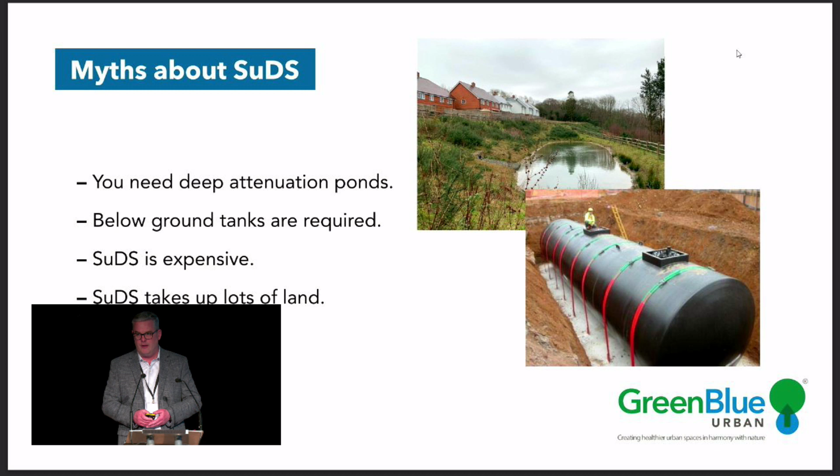Now, regarding the ponds, there's loads of good stuff associated with ponds. However, on some development sites, when you're really wanting to max out on units, if you can capture the water where it lands, which is what we generally term source control, and we've got the ability, which I'll touch on in a minute, to model these interventions really carefully, it sometimes means that a big bomb crater or a huge buried tank can be reduced in size significantly. We had a developer recently in Suffolk who redesigned their drainage scheme, and they came to us saying, we've actually achieved 20% extra units. So they were very much better off.

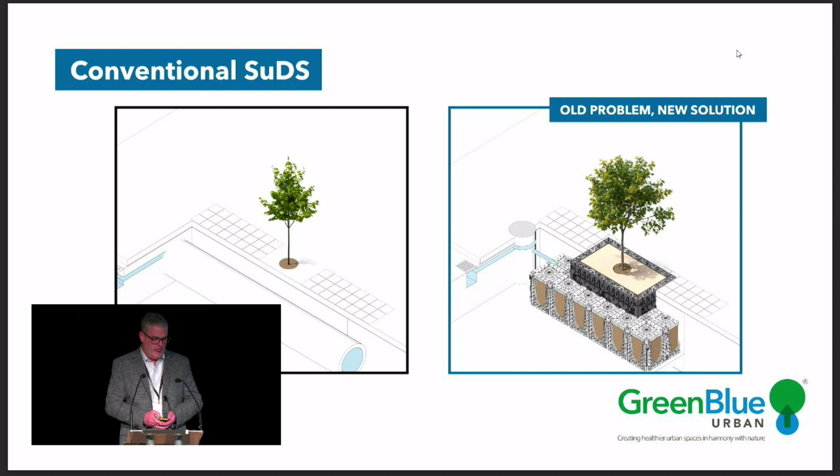So a couple of little illustrations there. We've got the old problem and the old solution, which is potentially an oversized pipe, whereas the new solution is really carefully managing the surface water, maybe around, for example, a tree pit. So a lot of you probably are aware that to get a tree to grow in an urban environment, a tree needs lots of good quality uncompacted soil.

Now, a lot of people don't know how much, and there's some brilliant formulas, which I won't go into too much detail now, but typically a tree might need anything from 15, 20, 25 cubic meters of soil, which is huge. That's a big hole. So to do that, we pioneered what we call the structural soil cell back in 2001. And we developed it. In principle, it's not unsimilar to an attenuation crate. You just simply fill it with soil. It's very, very strong structurally.

You put an aeration deck over the top, and then you can build a road or a car park or a pavement. And what it does is it preserves the integrity of that soil, so it prevents it becoming compacted and keeps it very well aerated. And of course, what we realized a decade or more ago now is that that profile is also an ideal profile to pass surface water through. There's loads of void space.

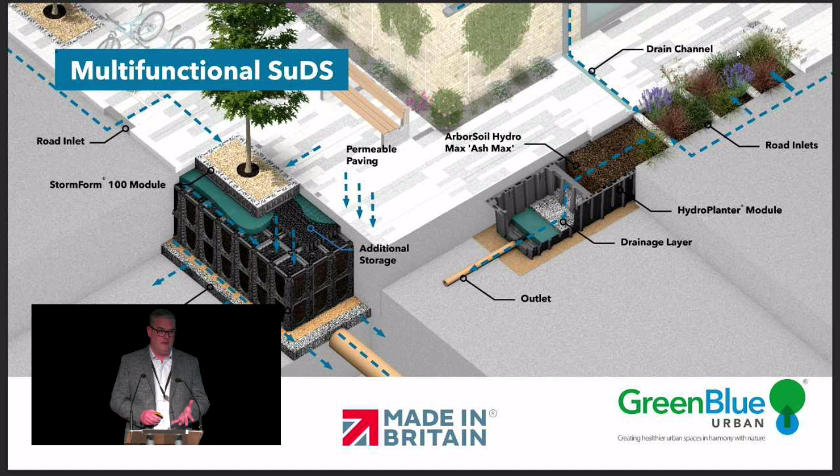Soil is brilliant at cleaning water. It massively slows the runoff down, and of course the tree benefits every time it rains because it gets a drink, particularly in the summer months. And of course, as we know, in the summer months, trees will actually use up quite a lot of water. It's difficult to quantify because of loads and loads of variables, so often again it doesn't go into modelling data, but we've done some testing of how much water trees can use, and even fairly newly planted trees can use 8 to 10,000 litres of water per year.

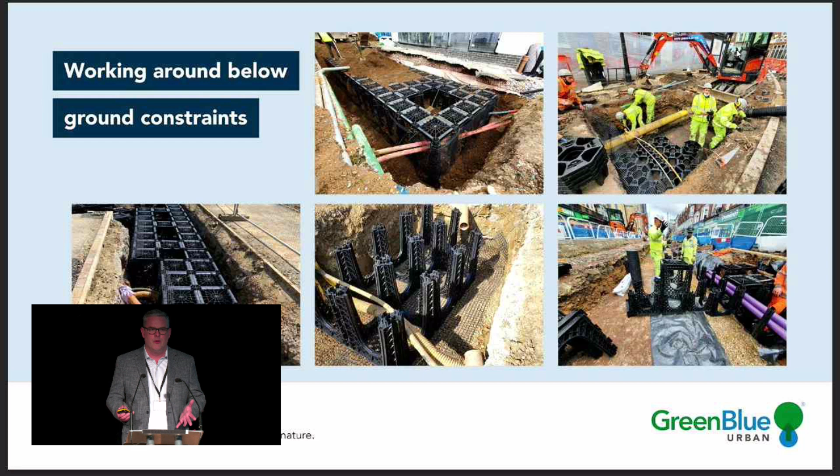Strongly recommend that you engage with the utility provider. However, I would say it's not infrequent for these sort of situations to happen, and the contractor has just got 2 days to plant his tree. So it's all installed and the utility provider is none the wiser. Now, I'm not too concerned about that because tree roots don't have diamond tips on the end. They're not good at drilling holes in things, and they'll very happily coexist around an awful lot of ducting. They'll get into a broken clay pipe and cause absolute mayhem, but a lot of modern pressure-tested utilities, they'll never ever cause a problem to.

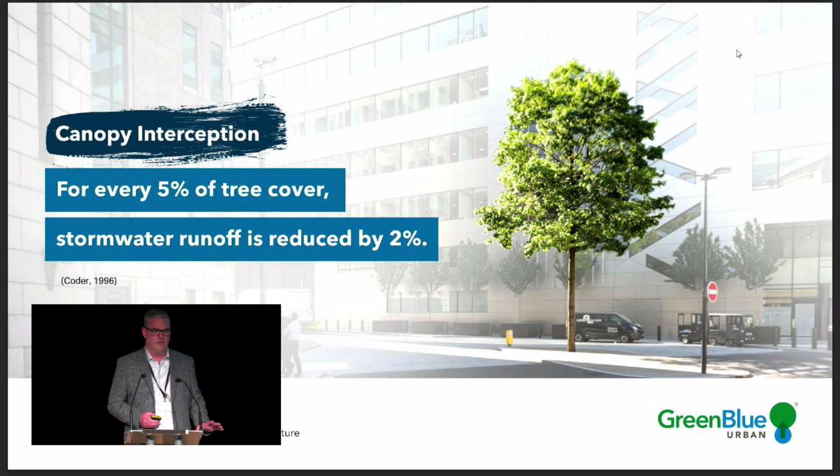This is quite a fun fact. For every 5% of tree cover, stormwater runoff is reduced by 2%. Now, that needs more research, absolutely without question, because there's so many different types of tree, and a lot of canopy cover is held while the tree is in leaf. So with a deciduous tree, you get very different performance during the winter months. But I don't know if you guys have ever been to St. Peter's Square in Manchester. It's one of the finest tree-covered squares, I think, in the UK.

It's got enormous Paulownia tomentosa trees, which are foxglove trees with huge leaves about the size of an A4 piece of paper. If you go there during a really sharp storm, you'll just get these wonderful rain shadows, so zones of dry ground underneath the canopy, and everybody runs underneath the trees for cover, and you just see a few wet footprints and lines from pushchairs and whatnot, but it stays bone dry, and the water that's landed on that canopy never ever reaches the surface.

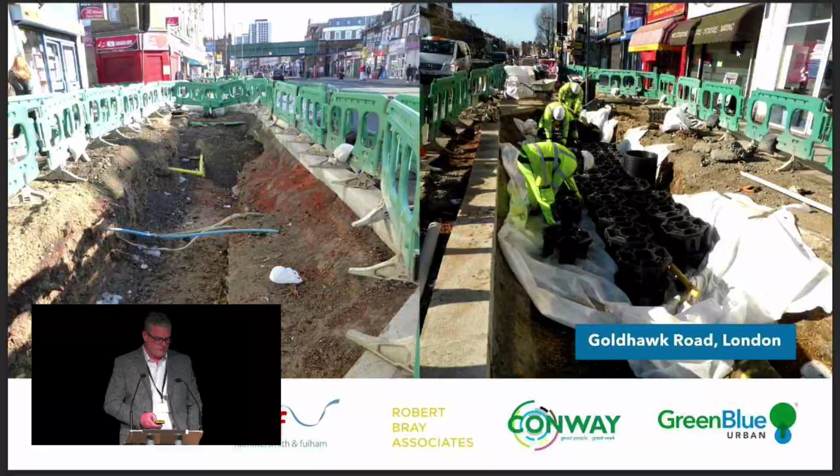So once it's installed, most people just walk past that without even realising. However, if you're aware of what's going on and you happen to be down there when it's raining hard, it is fascinating to see this water just disappearing into a curb inlet, and you know fine well that that is being really well filtered. It's watering the tree. In some situations, it'll be infiltrating back into the ground. I don't think it was here. But it's massively taking the peak off our sharp storms by slowing the water down.

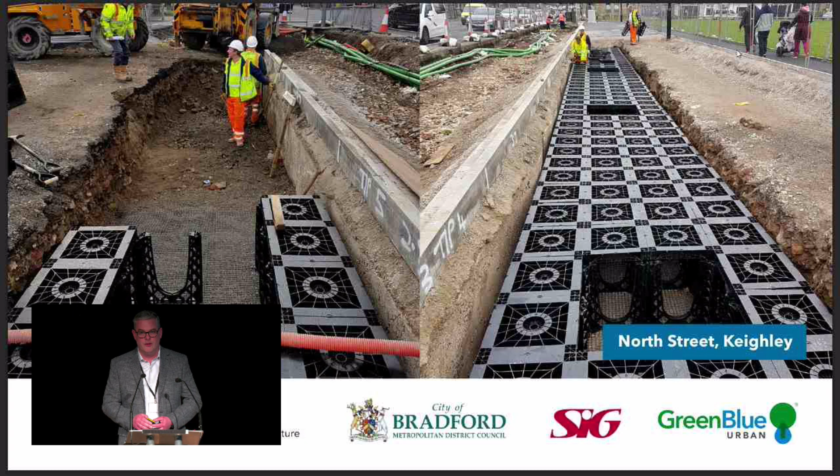This is another really interesting one. This is what I call a textbook SUDS project in Keighley, just outside of Bradford. This is our more modern soil cell, which we call the root space. Now, the contractor was a bit eager on this. On the right-hand side, he popped all the lids on without putting the soil in. So you'd have the gravel drainage layer at the base, then you install the system, fill it with soil, then you put the lids on, and then you have the layer works, obviously up to your wearing course above that. So you can see the metre square apertures where the trees are going to be planted, so it's always beneficial to link tree pits up where we can, because they can share rooting volume.

But the interesting thing about this is that there's several hundred square metres of a reasonably major town centre road. There's 3 lanes of traffic coming towards us. There's traffic lights, there's vehicles braking and ticking over and shooting off again. And you can see the gaps in the curb where the water's running in. There's obviously silt being washed in off the road. The weeds are sort of thriving on it. And maintenance is shocking. Those trees were planted in 2017, and I don't think anyone's been back there once.

We pop back there quite regularly because it's a really important project for us. But there's just a line of 6 trees. So Yorkshire Water are chuffed to bits. They've got a whole chunk of catchment taken out of their combined system. Those trees are growing like the clappers, faster even than if in a tree nursery. And all the benefits that trees bring: biodiversity, shade, reduction in wind speed.

At this point, quite a few people say, well, what about all the build-up of contaminants going to those tree pits? There's some guidance in the CIRIA SUDS manual that you ought to whip all this out and replace it every 25 years. Now, to me, without putting too fine a point on it, that is absolute nonsense. But it's all very well me saying that. Where's the evidence? So we did a lot of work begging for funding a year or so ago. Didn't get anywhere, so we funded it ourselves.

This is an interesting one. A lot of you guys will be very familiar with the Greener Grangetown project in Cardiff. We were very involved from early design stage on this one. For those of you who are not familiar with it, it's a sizable catchment. I think it's about 14 streets which back onto the River Taff.

And prior to this work happening, it's back-to-back Victorian housing, so very little chance for any water getting into the ground. All rushes off into the combined system, polluting the Taff. It's having to be pumped about 9 miles to the nearest treatment works. So we looked at a heavy engineering solution, bigger pipes, bigger pumps, 30-odd million quid.

And then we sat down and really thought, loads of liaison with the residents, absolutely critical on retrofit SUDS, get them on board. And we came up with a much, I'll say simpler, a completely different design scheme, which cost about a tenth. It was about 4 million by the time it had gone in.

And what we've done is we very carefully designed these little build-outs in most of the roads. The tree pit extends out underneath the paving areas. So those trees, although there's a little small area because parking's at a premium, the actual soil volume available for the tree is much bigger, about 8 to 10 cubic metres. And this scheme just works a treat.

You get a heavy storm, about 80% of the catchment that was going into the combined system is completely removed. They've got to keep a little bit in, I think, to keep the brick sewers cleansed to some degree. And this water is discharged straight into the Taff. The water that's going into the Taff is now very much cleaner than the water running down the Taff. And it's going out at a very controlled rate.

It's completely transformed the area visually. Aesthetically, it looks incredible. The property prices jumped 15% after the project was done. So it's an absolute win-win situation. So that's just one of the other streets. I've often thought if you're a savvy investor and you knew where a scheme like this was coming up, you'd buy up half a dozen houses and make a few quid.

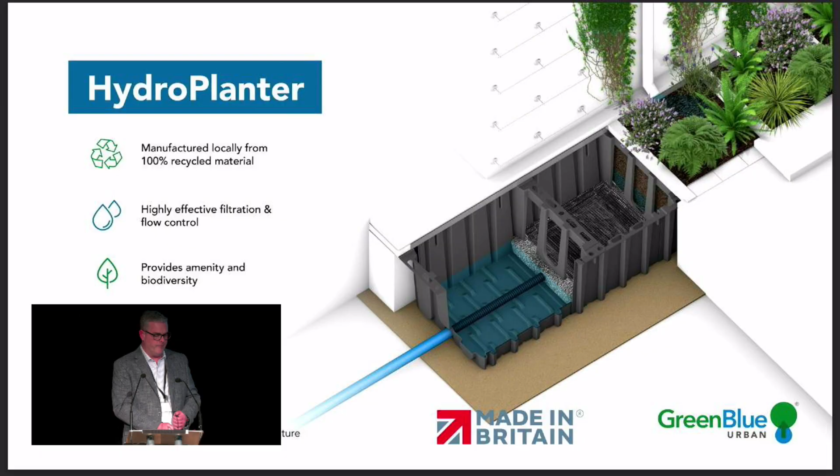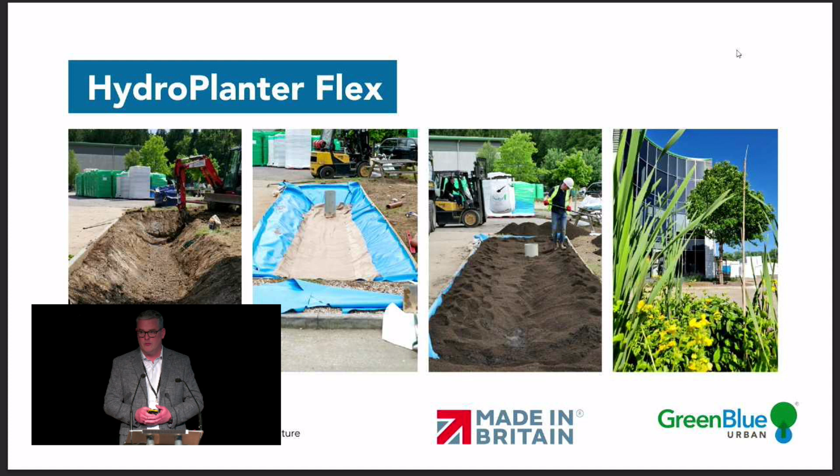So the HydroPlanter is great when you've got nice linear straight lines. If you want to create radiuses or fancy shaped rain gardens, we do a suite of products which we call the Flex, which in principle is very similar. You just do different areas.

And one of our latest products we've produced is what we call the SuDSPod. Now, we don't take credit for the design of this because it was actually invented by a very clever chap up in Scotland about 4 or 5 years ago, and he got a guy doing his PhD to do a lot of modelling work on it.

But he couldn't get anybody in the industry to make it for him or to take it seriously. But he came to our 30-year anniversary event a couple of years ago and said, I've never ever met a company with so much passion for combining green infrastructure and SUDS. So we looked into what he'd produced, and it was actually really clever. So it's very different to just a box with plants in it.

It consists of a planter box on the top, so it looks really nice with plants growing in it. But there's 3 chambers in it. So over on the right-hand side, that's the first chamber with a built-in silt trap. And then there's a vertical partition with little flow control orifices, which have been optimized for a 50 to 60 square meter catchment and storm events up to 1 in 30.

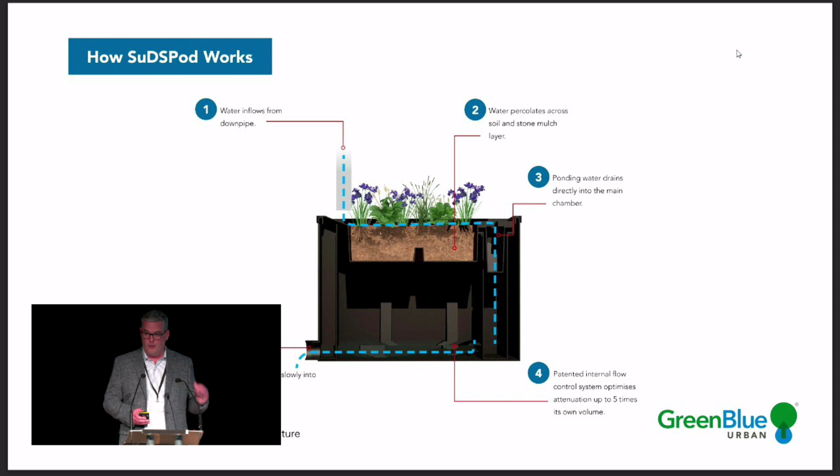So the water then flows into the first chamber, flows through the hole into the big second chamber, and then right at the far opposite side where the outlet is, there's another small chamber with a very similar pattern of orifice holes. And at the very top of that last chamber, there's a little weir for the exceedance route.

So if we had a catastrophic storm, I'm talking where water's spilling over the top of gutters and whatnot, it would never actually overflow, it would just exceed. So the way this works is quite different to a water butt. Water butts are great, but when they're full, they're not very great, because you've got some stored water, but they don't do anything for slowing down the flow.

But what this does is it gradually drains all the way through the duration of the storm and for a few hours afterwards. So we've done loads of different storm scenarios, and there was one particular storm scenario which is quite long. I think it was a 1 in 5, 24 hour from memory. And we measured, the water got almost to the exceedance point, but not quite, and then slowly back down again.

Now we measured the volume of water that had come out at a controlled rate of between 0 and 0.8 litres a second, and it was actually over 5 times the volume of the unit itself. Now some people say, well, how can it take more than its own volume? Because it's draining down very shortly after the storm starts and continues draining down for a couple of hours, or maybe 2 or 3 hours afterwards, you're getting a very, very controlled flow rate.

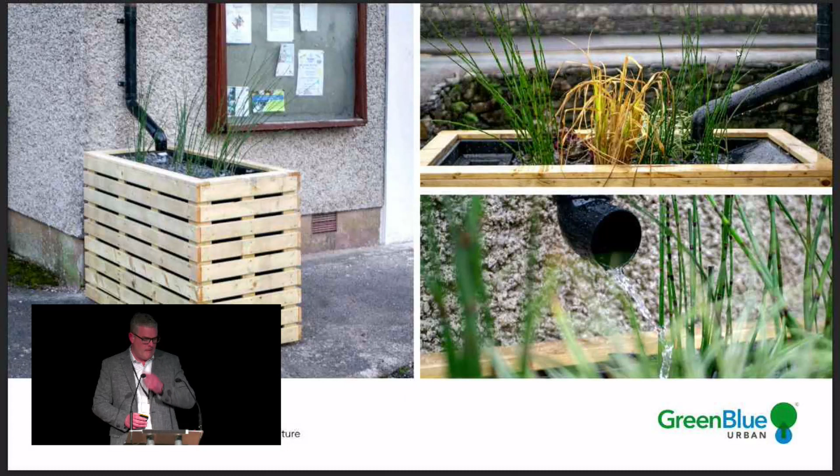So we've had a lot of interest from the water companies. We've got some quite interesting brochures next door, and it shows on the hydrograph we have the peak flow of water hitting the roof, and then a very similar graph of it actually entering the system, and then a really protracted long outlet. So if there's a CSO hotspot where there's, I don't know, 500 houses which are really making the problem worse, if you were to fit these sort of units to all those houses, we could actually model what the difference is. And we can model the difference between the various storm scenarios.

And I've got an example of a little small one. I think we just did it on 5 houses. And once you get up to sort of 1 in 30, the percentage improvement drops quite significantly. It's not designed for the 1 in 100. It's designed for the vast majority of the much smaller events. This is in the Lake District where United Utilities actually provided some for the residents up there.

So I just thought I'd show this one. Some of you might be familiar with Mold Town Centre. In the town centre of Mold is a very big car park, and they've had issues with flooding because it sort of flows in 2 directions and ends up down at one corner. I think the problem is a problem further downstream. But they've built a little flood wall in the bottom corner, which is just at the very bottom of the, you can just about make out the mud mark actually if you go onto Google Maps.

But they put a little right-angled flood wall because there's properties immediately behind. But just a few months ago, the water came within about 1 inch of overtopping. As we know, we're always going to get more severe storms, so it needs dealing with. So we did some simple modelling. We popped 8 trees across the car park. They're quite big excavations, and we're putting a permeable paving over the top of them, but we're not losing any car parking spaces. And just a few metres of our hydroplanter.

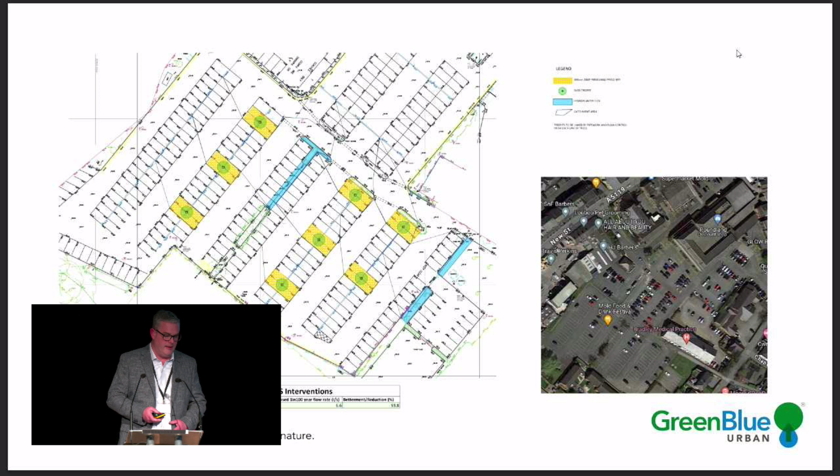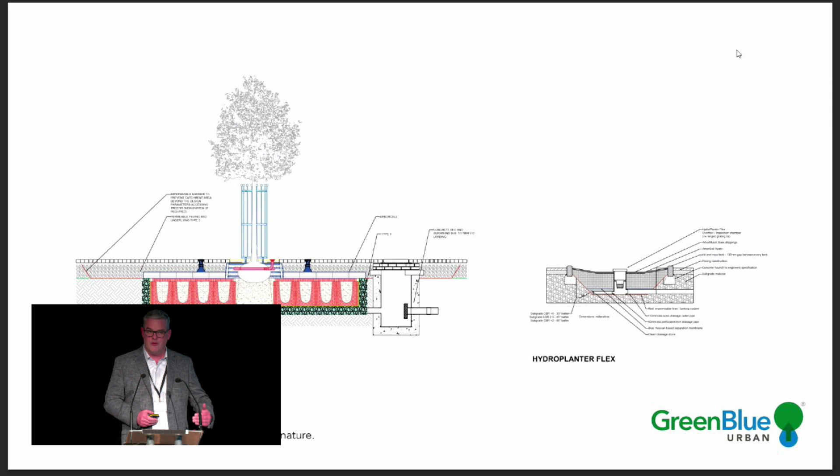So that's just a couple of cross sections of the tree pit itself. There's a flow control chamber associated with that. You wouldn't need one of those after each tree, just after each run. So I think there's about 5 runs in the car park.

So just a tiny bit more about GreenBlue. A lot of what we manufacture, and we've got our own in-house manufacturing facility, is either composite or plastic materials. Now, I know a lot's come in about plastic pollution and whatnot. Everything that we manufacture is 100% recycled. It's 100% recyclable again. We even offer the materials out of marine waste.

In fact, some of you might be familiar with the Churchill Way project in Cardiff, where they've opened up an old dock feeder. Really, really lovely project. And they specified all our RootSpace system, which was manufactured from marine waste. So the circular economy, where we're keeping plastics out of landfill, out of the oceans, we're burying it underground, out of sight. Our trees are going to get massive. We're going to have a completely carbon neutral installation.